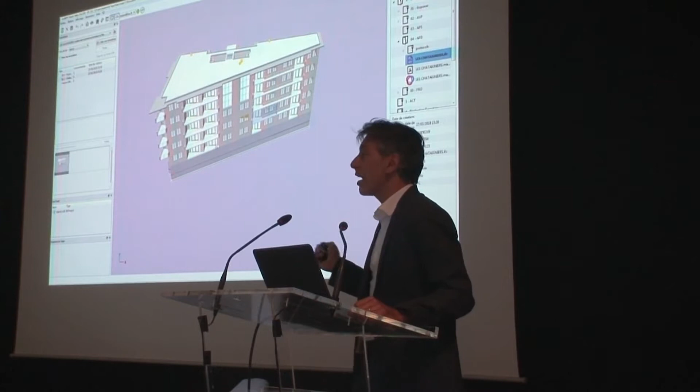I load the BCF, and I also know which IFC is associated with it. So I load my numeric model here and I'm able to browse through the topics that were created, telling me which parts of the model were violating the planned rules.

So here I can see, for example, the slabs or the walls which had an issue regarding what I wanted to find inside my model.

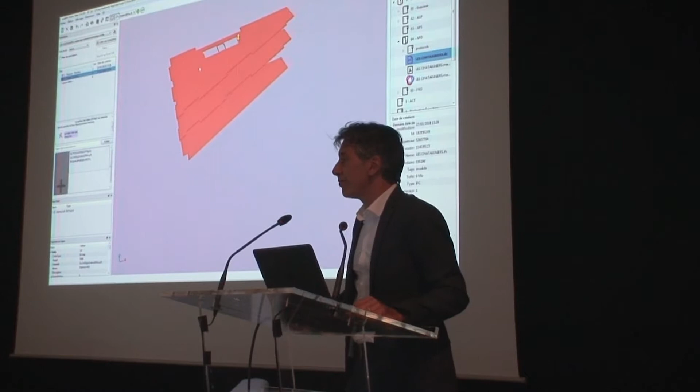So if you're a third-party service, a software provider, or you have an idea to get something integrated inside the platform, you can integrate the service and get triggered either on a folder or a file, registering as an external service that can react to certain events or certain kinds of files.

And I will show you some sample here. I still don't know when it starts or not. No.

It's working? Yeah, I guess so.

Okay, so this is how you can trigger services inside the platform. You can see the list of the integrated services, and we'll go back to that later.

Here I'm using the BIM calculator, a sample service we created for free for the platform. This service processes the IFC file and extracts quantities, like wall quantities. It's quite useful because if you're a painter, for instance, most of the time you don't understand numeric models. You just want to know how much work you have to paint, so you can do quotations. So we need a really simple tool for this kind of people, or the number of electric sockets if you're an electrician.

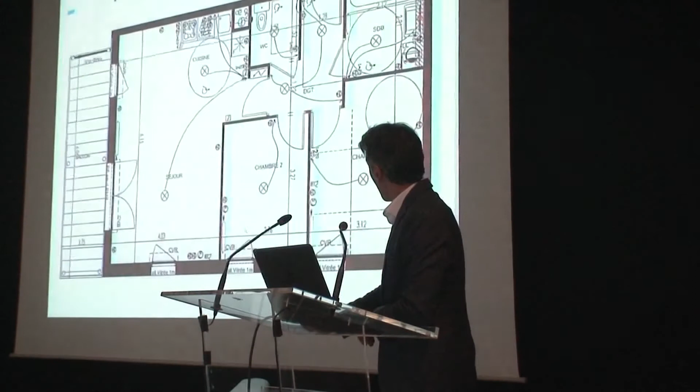These guys are able to create a 3D model out of a 2D plan. WiseBIM can be triggered on GIF, JPEG, or a basic image. This was a prototype in this video.

I think it's better now. It routed to the WiseBIM service. You provide some information, they get the document, process it, and create a 3D model out of it. So it tells me I go through the service, it puts me back inside the platform the IFC, which has been generated out of the 2D version of it.

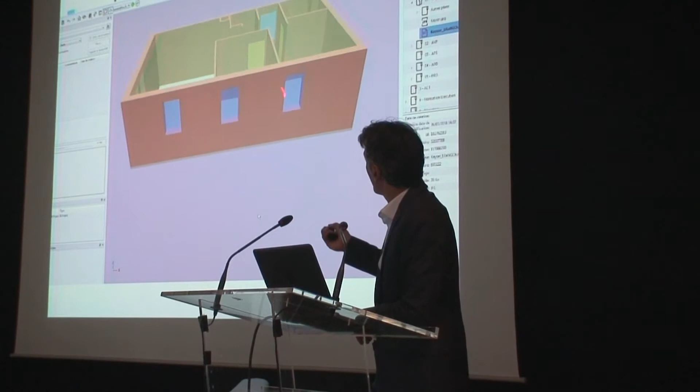Once again, I use Kroqi to get connected. I use WiseBIM, which is free and integrated, to get connected to the platform. When I click on the document, it gets me to the right place, and I'm able to visualize the IFC which has been created by WiseBIM.

Another example, more simple I would say, is Bâti-Chiffrage. These guys provide an online application to help artisans create a quotation, because sometimes they don't know how to do it.

So in that case, I go into a certain folder, like one shared with my client, for instance. I go through a quotation system here. I want to create a quotation, so I choose among certain predefined actions so that it pre-configures the quotation.

So here I want to make a demolition of about 80 square meters. It gives me a default price, which I do not change. As a user, I can customize a little bit my quotation.

And then I finally want to export it to the Kroqi platform. Once I do it, this service uses the APIs to put back in the platform a PDF, which is the final quotation I can share with my clients.

Okay, another one is Labio. They have a laptop application that enables a way of viewing numeric models, and they also have checkers and some specific plugins that you can use.

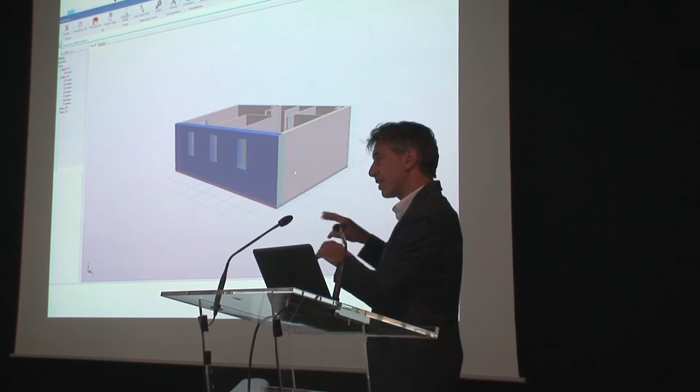This capture demonstrates that another application can use the API to get connected to the platform on behalf of the user and browse through the directories to retrieve documents. This will be improved once we have the SSO set up, because instead of starting from the web interface, you can get connected from the laptop application, be identified, and access the platform to retrieve documents without having to start from the web page.

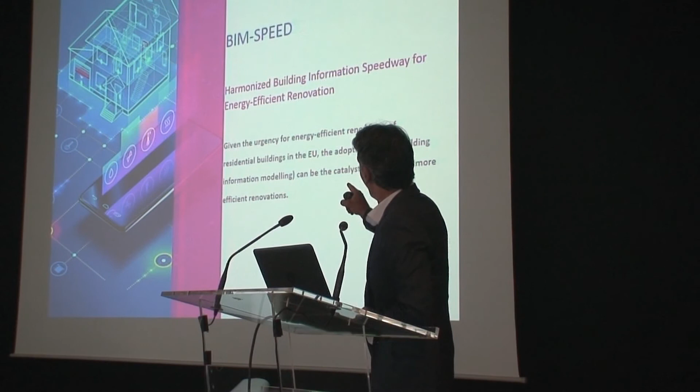Good. So this Kroqi is the backbone of the BIM-SPEED project. BIM-SPEED project is about renovation. The goal of this project is to create a set of tools which make the renovation easier, better, and more effective. It's a project we started last November, for 4 years.

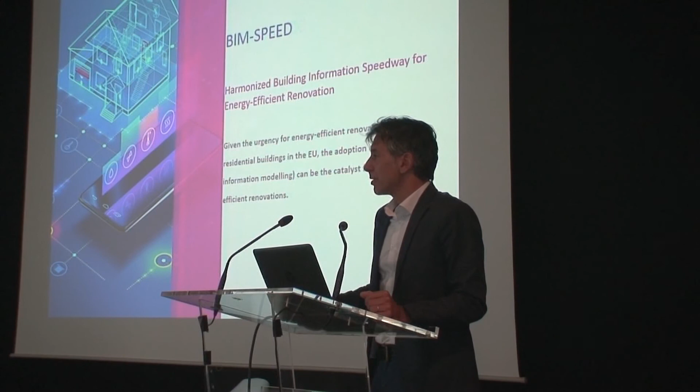Just a few slides. We will have 13 demonstration places in Europe, like Spain, Romania.

These guys will use the Kroqi platform and the integrated services from the partners in order to do renovation, which means that we want to acquire the BIM models through drones or whatever, then create the BIM, and then extend the BIM, create simulations to find some other options, and then do the renovation and be sure that the renovation is good regarding the provisions that we had.

So we are working on that with some metrics here which are defined. And there is a set of users, and it's quite interesting. We've got some universities around Europe. We've got some software editors like SciPy, and then we talk with these guys to understand what can be a workflow, and what kind of technology each partner is using, and how we change that inside Kroqi so it's easier to use for the end users.